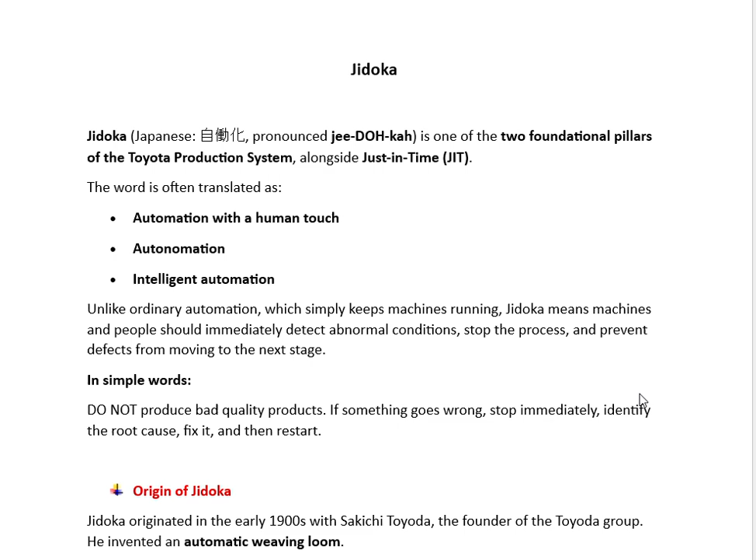Unlike ordinary automation, which simply keeps machines running, Jidoka means machines and people should immediately detect abnormal conditions, stop the process, and prevent defects from moving to the next stage. In simpler words, do not produce bad quality products. If something goes wrong, stop immediately, identify the root cause, fix it, and then restart. So this is the very basic definition of Jidoka.

How and when did Jidoka originate? Jidoka originated in the early 1900s with Sakichi Toyoda, the founder of the Toyoda Group. He invented an automatic weaving loom. Before his invention, imagine one worker supervising 20 weaving machines. If one thread broke, the loom continued running. It produced meters of defective cloth, hundreds of meters turned to waste.

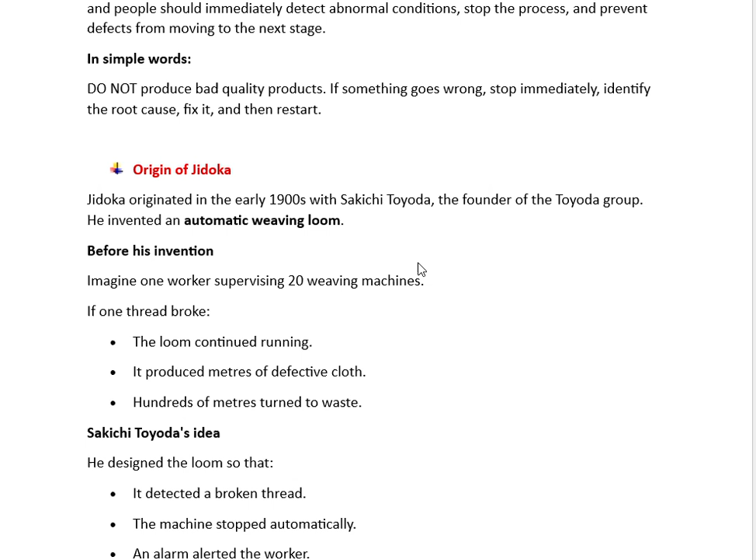So if a thread is broken, there is no point in producing or selling the defective part. This was happening prior to the introduction of Jidoka. Sakichi Toyoda designed the loom so that it detected a broken thread. The machine stopped automatically. An alarm alerted the worker. The result? Only a few centimeters of cloth were defective.

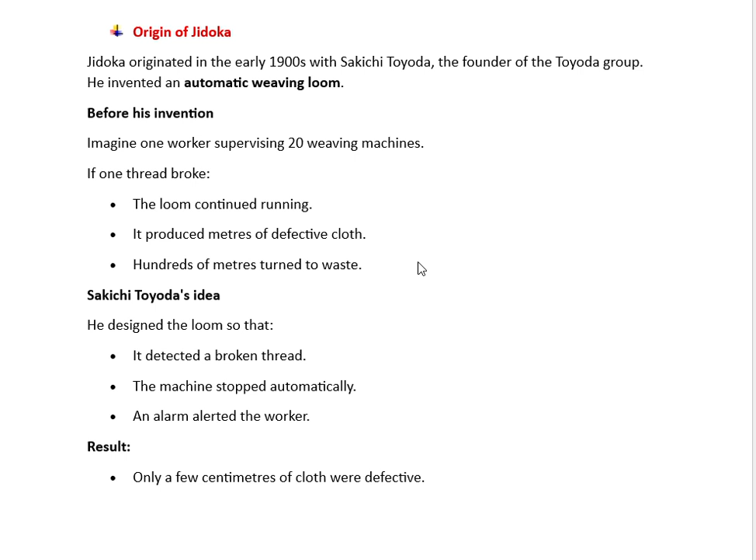Instead of hundreds of meters of defective cloth, after Sakichi Toyoda's idea only a few centimeters of cloth were defective or produced as waste. Waste reduced dramatically. One worker could safely supervise many machines.

So Jidoka is the capability of equipment or operators to automatically detect abnormalities, stop production immediately, notify responsible people, and prevent defective products from progressing further. The philosophy is quality should be built into the process, not inspected afterward. Generally, the quality team goes for inspection, and if there is abnormal behavior or defective parts, they can suggest improvements at the time of inspection.

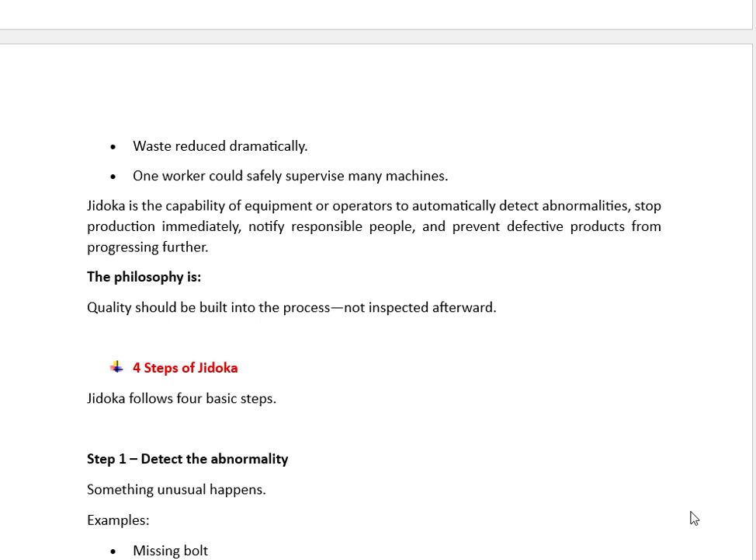But the concept of Jidoka is that quality should be built into the process. There should not be defective products. The quality team should not have to find defective products at the time of inspection. Instead, the defective product should not be produced at the time of production.

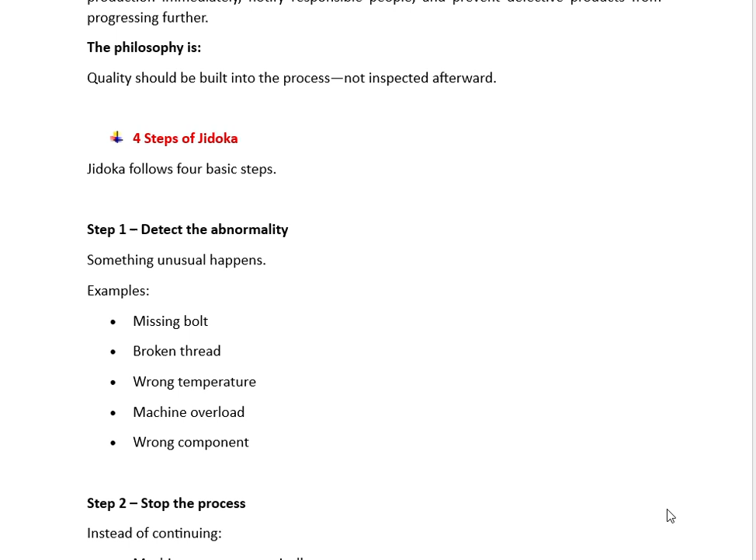There are four steps of Jidoka. The first one is detect the abnormality. Something unusual happens, say a missing bolt, a broken thread, a wrong temperature, an overloaded machine, or a wrong component. Step 2 is stop the process. Instead of continuing, the machine stops automatically. The conveyor stops, a robot pauses the operation, or the operator presses the stop button.

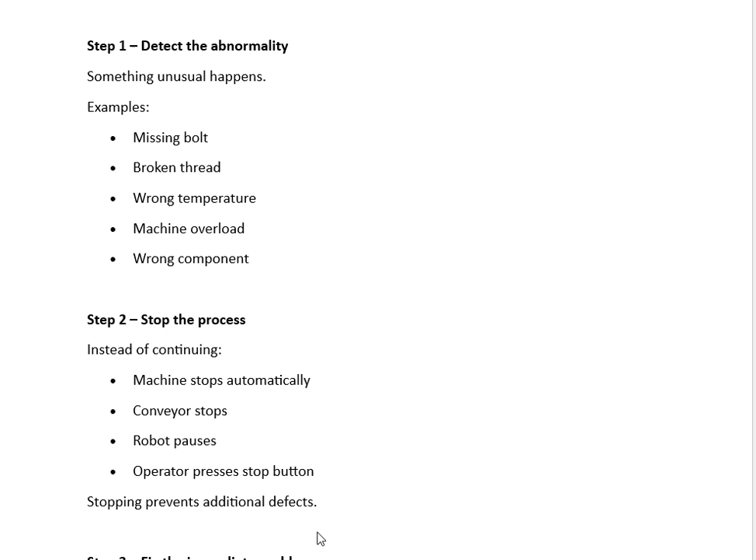Stopping prevents additional defects. Say two or three defective products are produced, but the worker or the machine figures out that there are defective products, so the machine stops automatically and a message is sent to the concerned person to look after it.

Step 3 is fix the immediate problem. The issue is corrected, for example, replace a broken tool, tighten a loose bolt, refill material, or replace a faulty sensor. I'm just giving examples here. It can be anything according to the abnormality found in step 1.

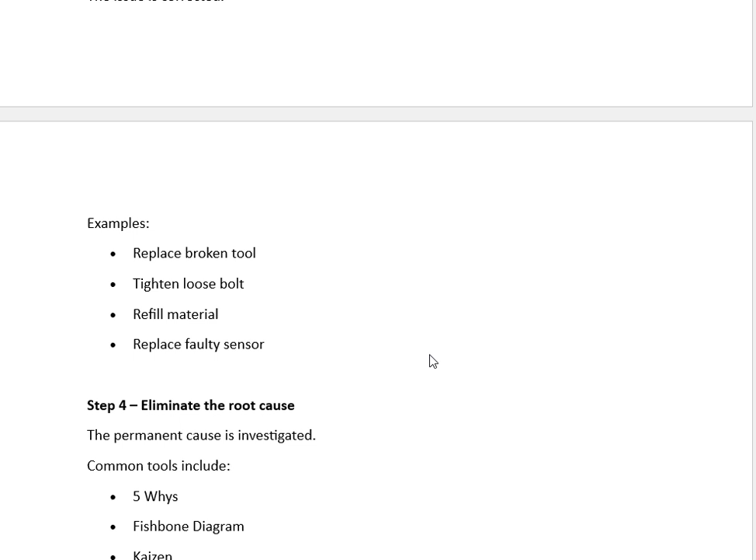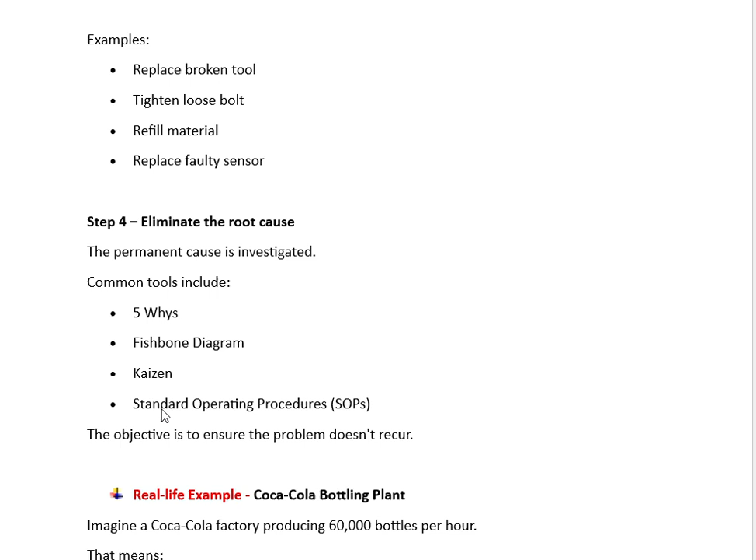Step 4 is eliminate the root cause. The permanent cause is investigated. Common tools include 5 whys, fishbone diagram, Kaizen, and standard operating procedures, SOPs. These tools help in eliminating the root cause. I will cover this in a separate video. Just remember the names: 5 whys, fishbone or Ishikawa diagram, Kaizen or continuous improvement, SOP. The objective is to ensure the problem does not recur.

Let's understand this with a real life example, a Coca-Cola bottling plant. Imagine a Coca-Cola factory producing 60,000 bottles per hour. That means 1,000 bottles every minute, around 17 bottles every second. Since production is so fast, humans cannot inspect every bottle manually. Instead, the factory relies on Jidoka through sensors, cameras, PLCs, programmable logic controllers, and automated inspection systems.

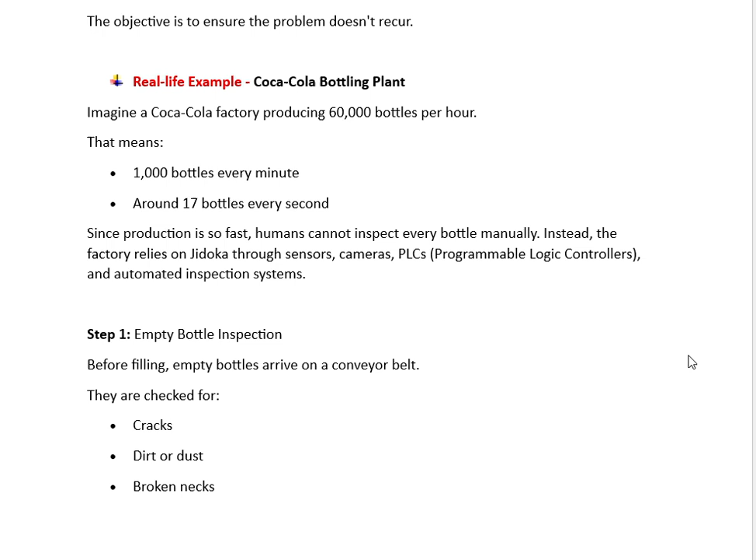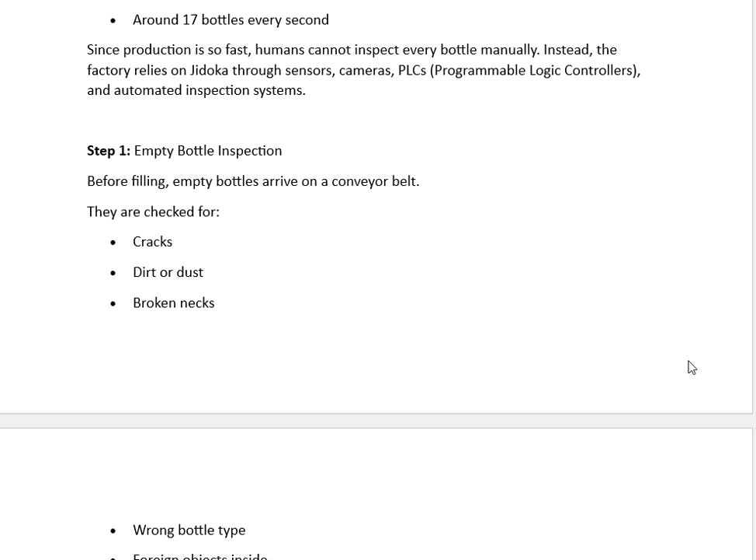Step 1 is empty bottle inspection. Before filling, empty bottles arrive on a conveyor belt. They are checked for cracks, dirt or dust, broken necks, wrong bottle type, and foreign objects inside. Without Jidoka, a cracked bottle enters the filling machine. After filling with carbonated drink, the bottle bursts because of internal pressure. Beverage spills, nearby bottles get contaminated, and the line must be cleaned. Production stops unexpectedly.

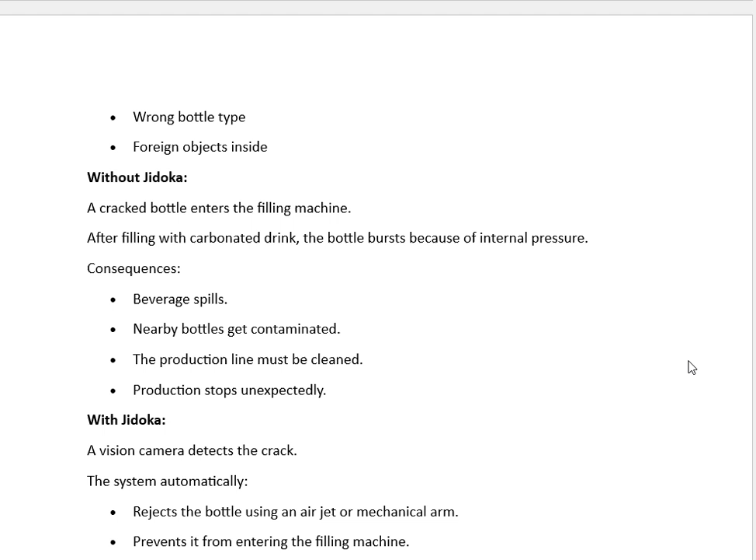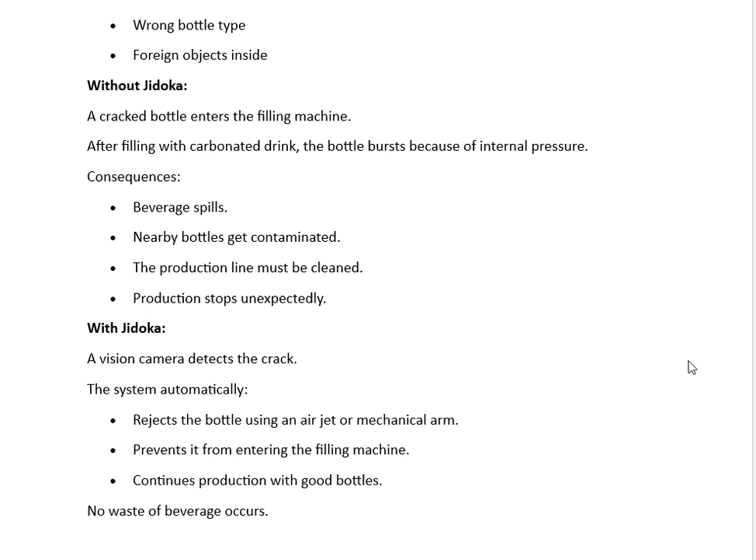But with Jidoka, a vision camera detects the crack. The system automatically rejects the bottle using an air jet or mechanical arm, prevents it from entering the filling machine, and continues production with good bottles. No waste of beverage occurs. So Jidoka helps prevent the wrong bottle from entering the filling area.

Step 2 is fill level inspection. Each bottle is filled with Coca-Cola. Suppose the target is 500 ml, but there can be the possibility that, let's say, a bottle is filled with 450 ml, which is less than 500 ml and considered underfilled, or 550 ml, which is considered overfilled.

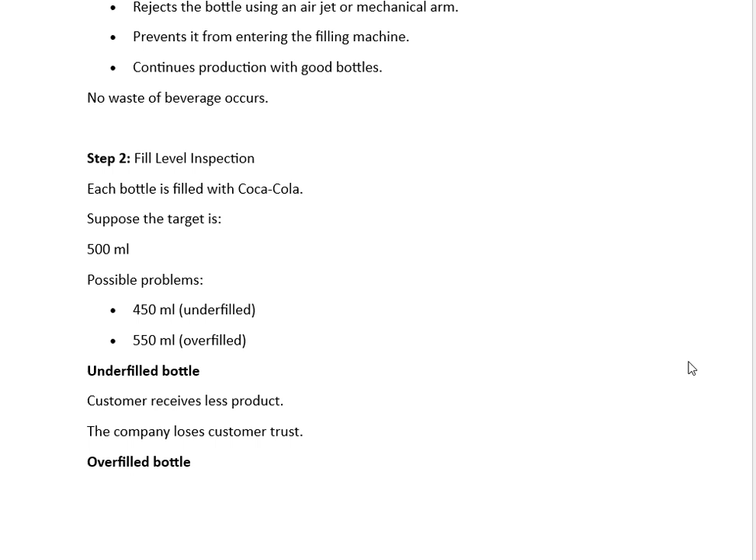So with an underfilled bottle, the customer receives less product and the company loses customer trust. Because if you send a smaller quantity, the customer becomes unhappy and there is a chance that the customer will not buy the product again, and Coca-Cola fails to retain the customer for future buying. With an overfilled bottle, the beverage spills during capping, causing sticky conveyor belts, increased cleaning, and product wastage. So it is a loss for Coca-Cola in case the bottle is overfilled.

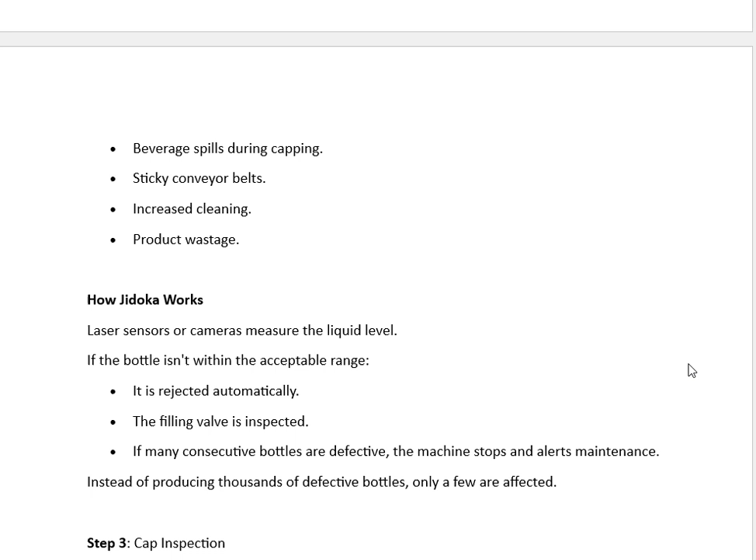How does Jidoka work? Laser sensors or cameras measure the liquid level. If the bottle is not within the acceptable range, it is rejected automatically. The filling valve is inspected. If many consecutive bottles are defective, the machine stops and alerts the maintenance department. Instead of producing thousands of defective bottles, only a few are affected.

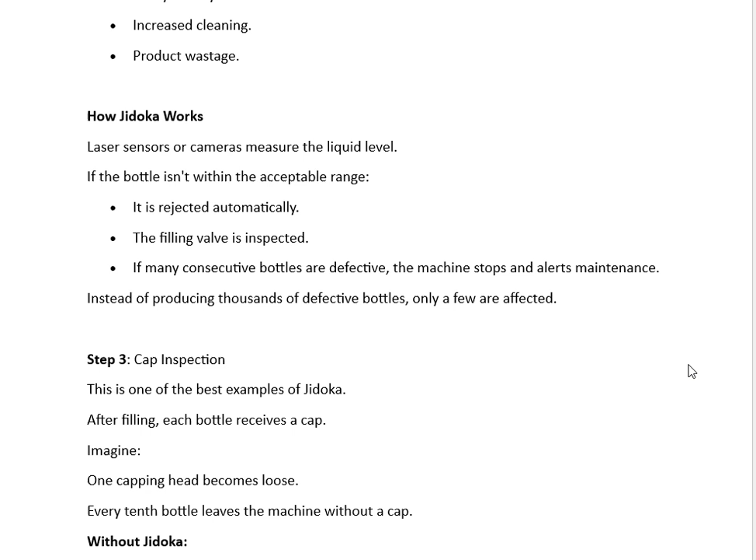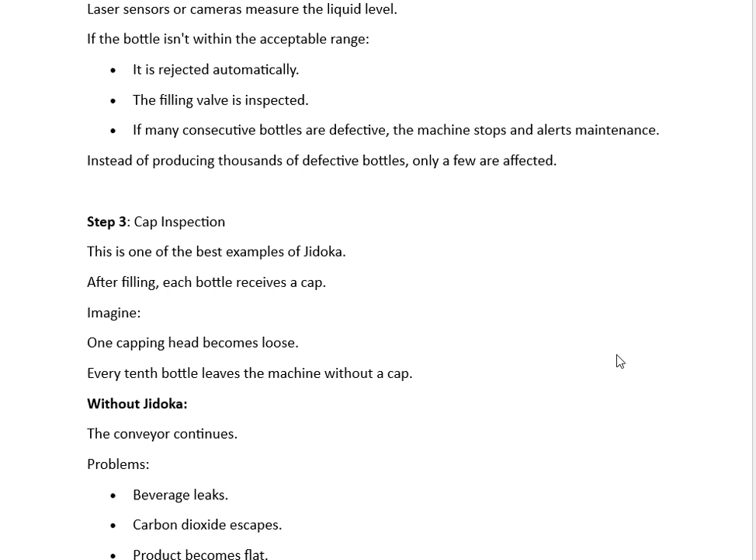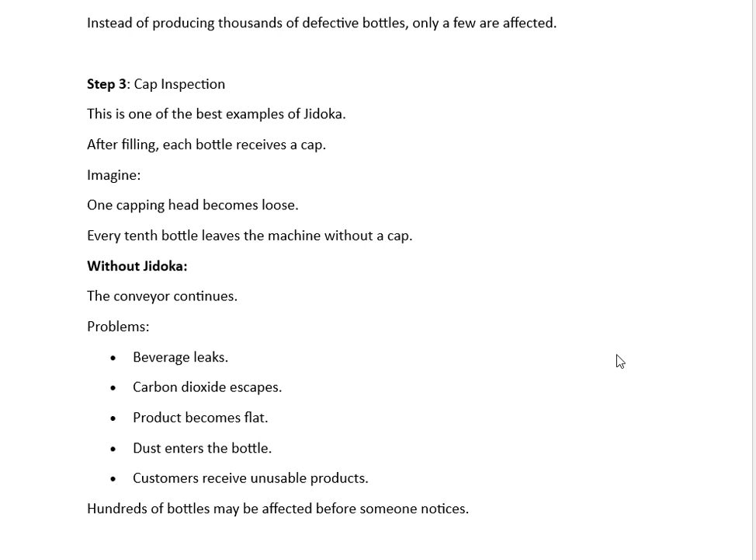Step 3 is cap inspection. This is one of the best examples of Jidoka. After filling, each bottle receives a cap. Let's imagine one capping head becomes loose. Every 10th bottle leaves the machine without a cap. Without Jidoka, what happens? The conveyor continues. The problems that arise are beverage leaks, carbon dioxide escapes, the product becomes flat, dust enters the bottle, and customers receive unusable products. Hundreds of bottles may be affected before someone notices the fault.

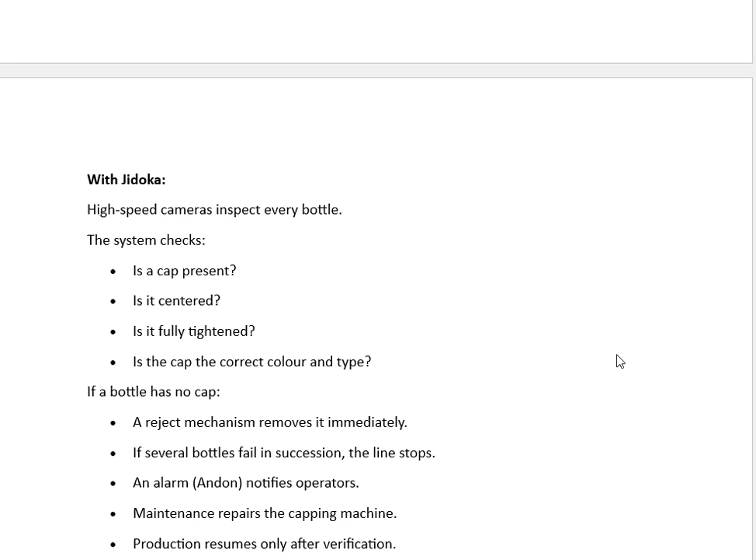But after Jidoka, high speed cameras inspect every bottle. The system checks: is a cap present? Is it centered? Is it fully tightened? Is the cap the correct color and type? If the bottle has no cap, a reject mechanism removes it immediately.

If several bottles fail in succession, that is one after another, the line stops automatically, which did not happen when Jidoka was not in place. An alarm then notifies the operator. Maintenance repairs the capping machine. Production resumes only after verification. So this is the advantage of Jidoka.

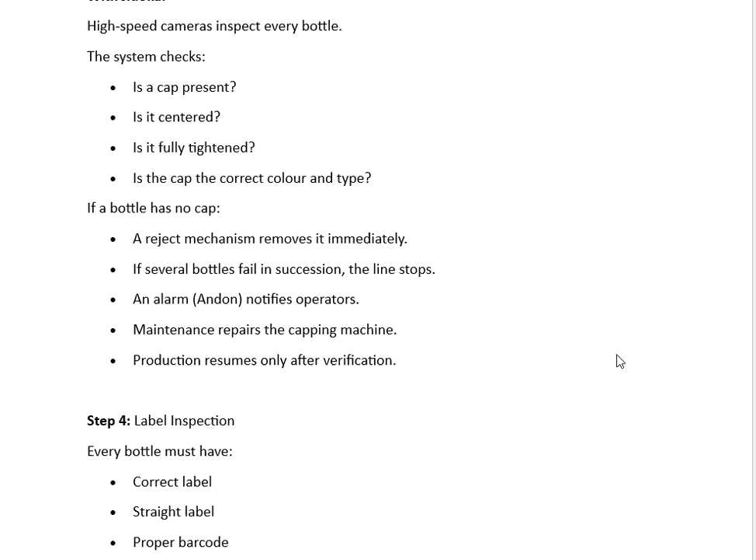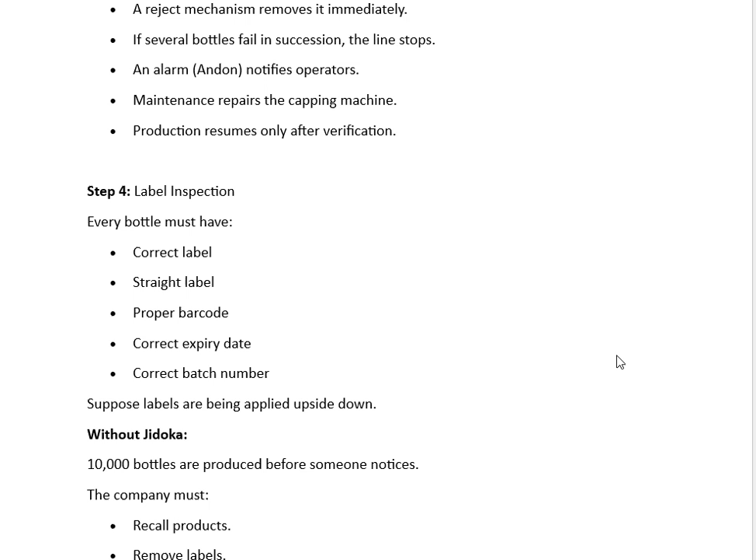Step 4 is label inspection. Every bottle must have the correct label, a straight label, a proper barcode, the correct expiry date, and the correct batch number. Suppose labels are being applied upside down. Without Jidoka, 10,000 bottles are produced before someone notices. The company must recall products, remove labels, relabel bottles, and spend additional labor and time.

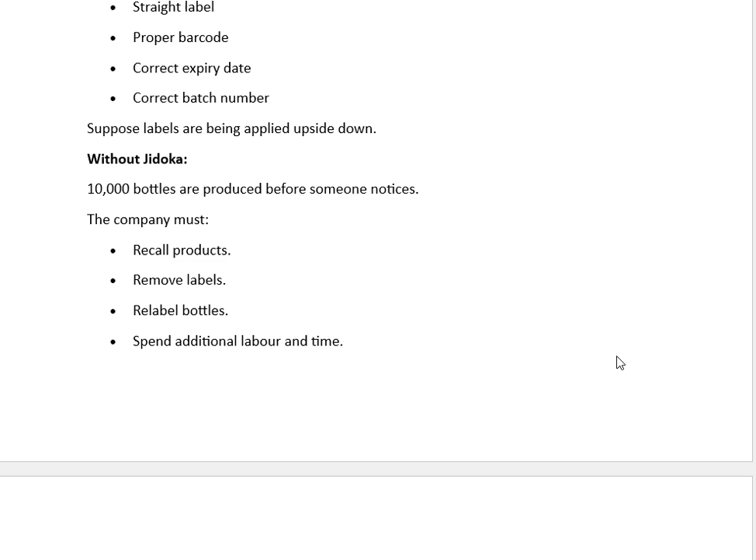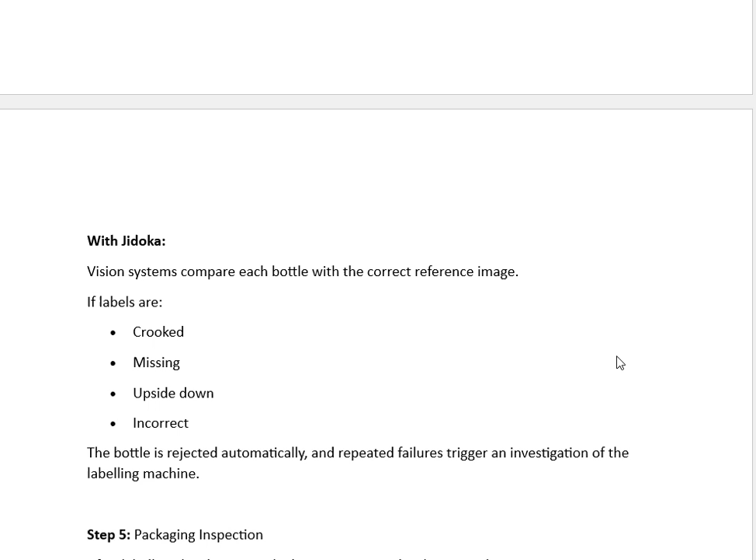But with Jidoka, vision systems compare each bottle with the correct reference image. There is a reference image and the vision camera compares each bottle with that particular image. If labels are crooked, missing, upside down, or incorrect, the bottle is rejected automatically, and repeated failures trigger an investigation of the labeling machine. A message is sent to the maintenance team. The people will look at it and whatever the root cause is, they fix it.

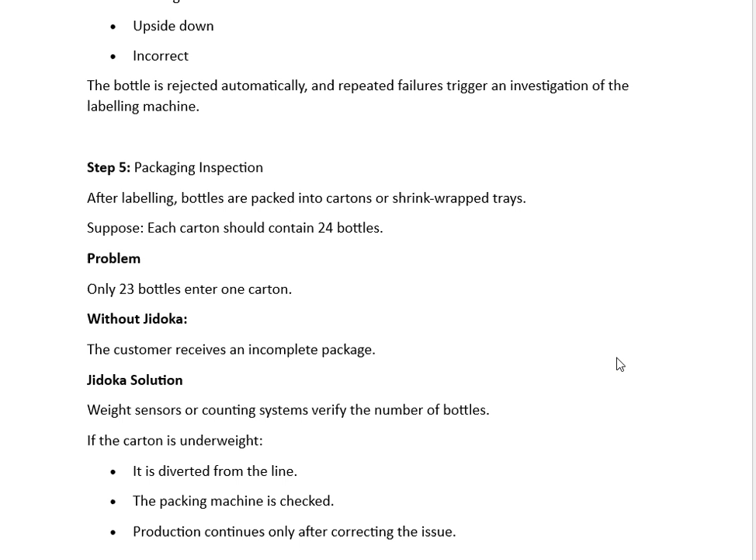Step 5 is packaging inspection. After labeling, bottles are packed into cartons or shrink wrapped trays. Suppose each carton should contain 24 bottles. The problem is only 23 bottles enter one carton. Without Jidoka, what happens is the customer receives an incomplete package. Instead of 24 bottles, a customer receives only 23 bottles. So this is again against customer satisfaction. The company loses the customer and it is quite difficult to retain the customer.

But with Jidoka, weight sensors or counting systems verify the number of bottles. If the carton is underweight, it is diverted from the line. The packing machine is checked. Production continues only after correcting the issue.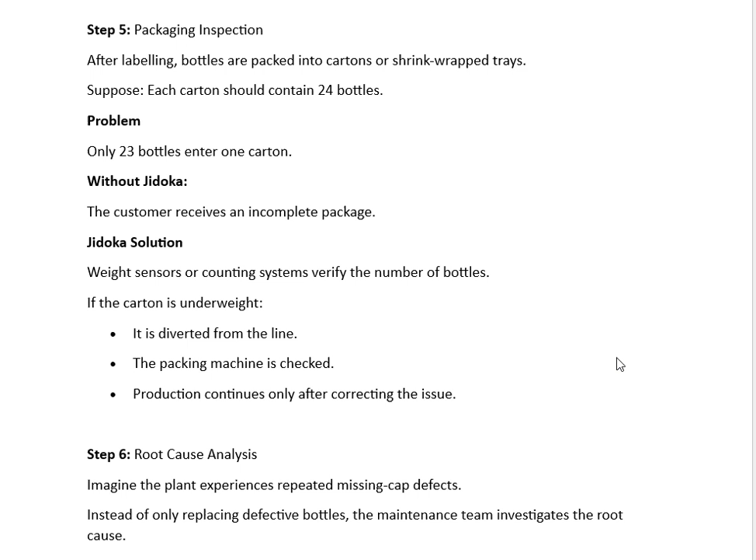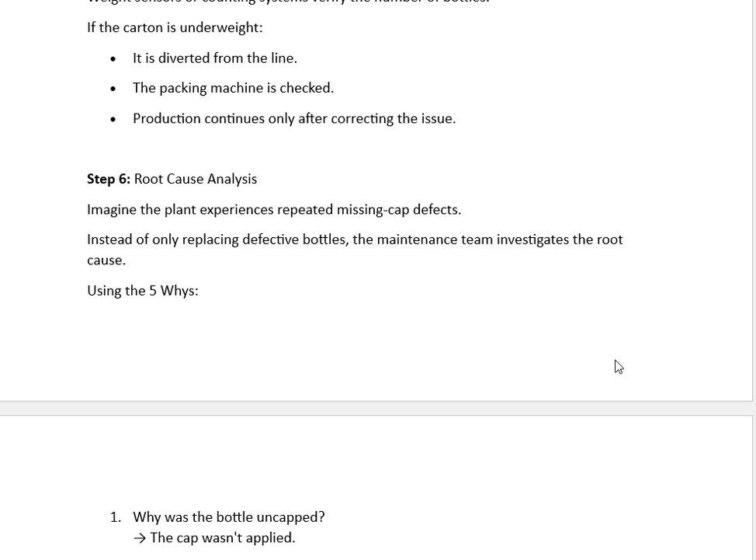Step 6 is root cause analysis, RCA. Imagine the plant experiences repeated missing cap defects. Instead of only replacing defective bottles, the maintenance team investigates the root cause using the tools which I mentioned earlier: 5 whys, Kaizen, SOP. So this is the 5 why. 5 why is basically asking 5 questions: why is this happening, why did this happen, like that.

The first one is: why was the bottle uncapped? The problem can be the cap was not applied. Why was the cap not applied? The capping head missed the bottle. Why did it miss? The capping head was misaligned. Why was it misaligned? A mounting bolt became loose due to vibration. Why did the bolt become loose? Preventive maintenance did not include periodic torque checks. So by performing 5 why, we can find out the root cause behind the problem.

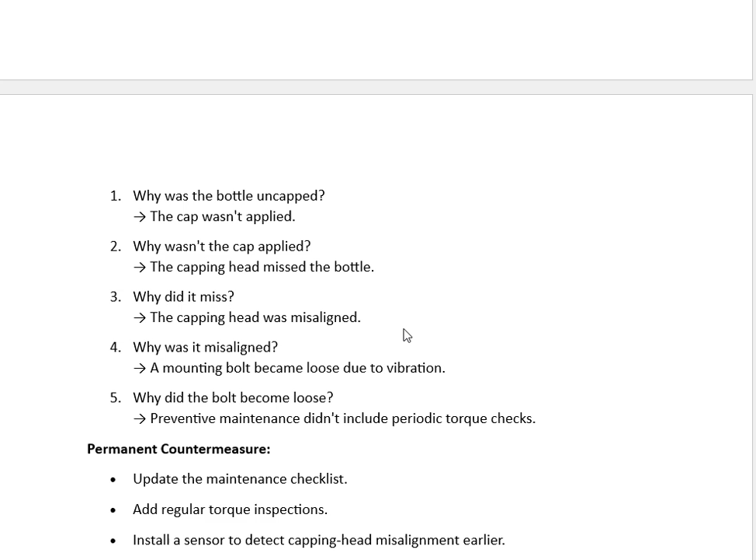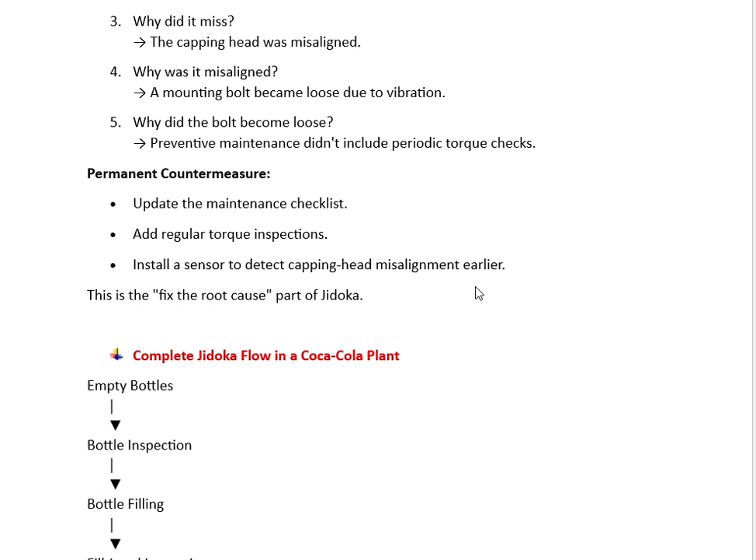Permanent countermeasure. First, update the maintenance checklist, add regular torque inspections, and install a sensor to detect capping head misalignment earlier. This is the fix root cause part of Jidoka. So this is the root cause and this is how the root cause is fixed.

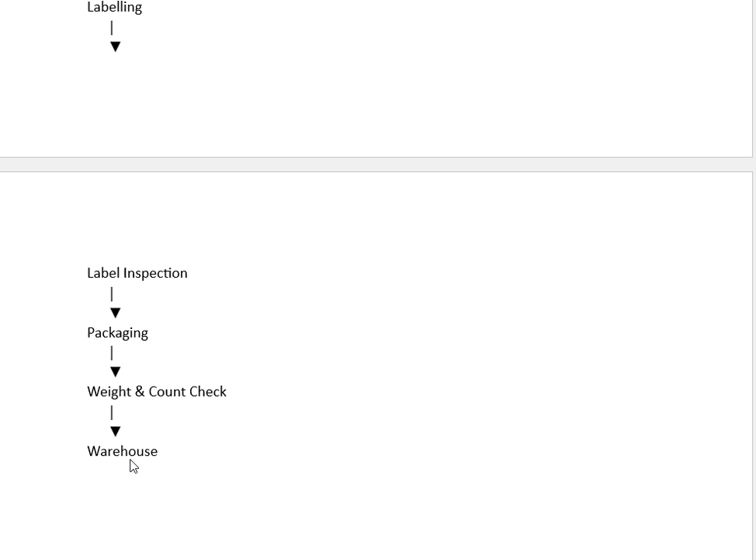So the complete Jidoka flow in a Coca-Cola plant is empty bottles, then bottle inspection, bottle filling, fill level inspection, cap installation, inspection, labeling, label inspection, packaging, weight and count check, and then it moves to the warehouse. After the warehouse, it moves to the customer. So this is the basic flow in a Coca-Cola plant.

I hope you understand what Jidoka is, how it originated, what companies or organizations faced prior to the introduction of Jidoka, and how Jidoka helped in preventing defects.